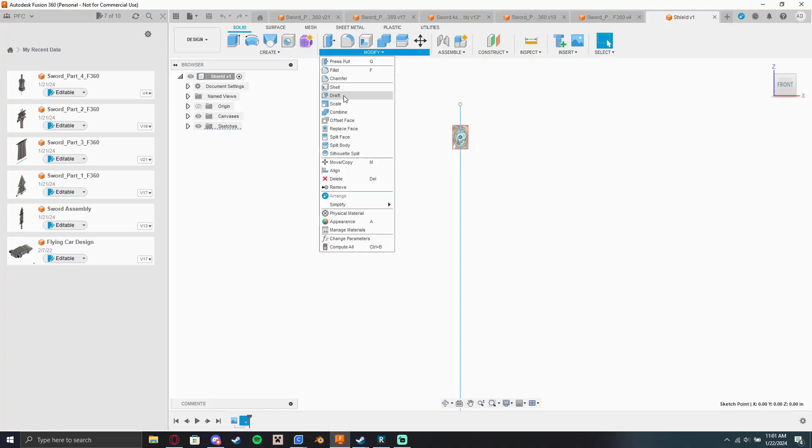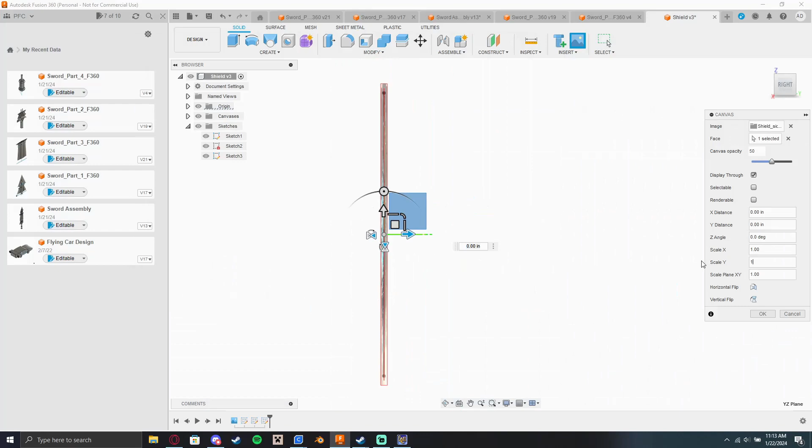When you're 3D modeling, you have to start somewhere, either an idea, a reference, or a straight up import of whatever you want to model. As for me, I used a combination of my idea to create my Renaissance Fair costume out of a 3D printed material, and to do that I wanted to model it myself, as I could not find the models online. I wanted to make them myself to challenge my ability and skill for 3D modeling, and so that's why I'm here.

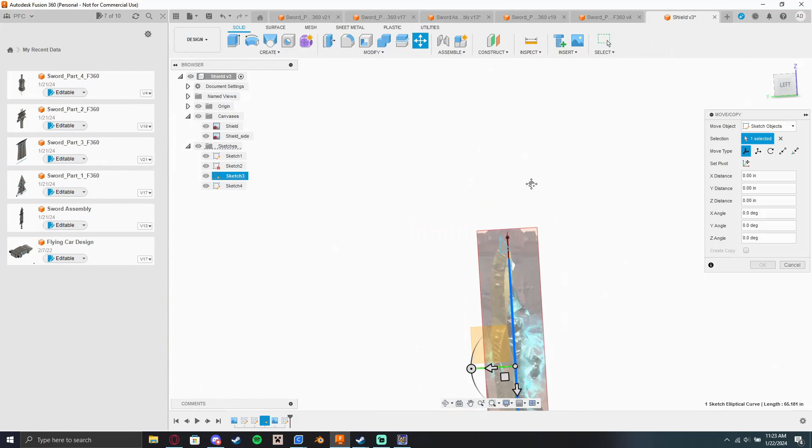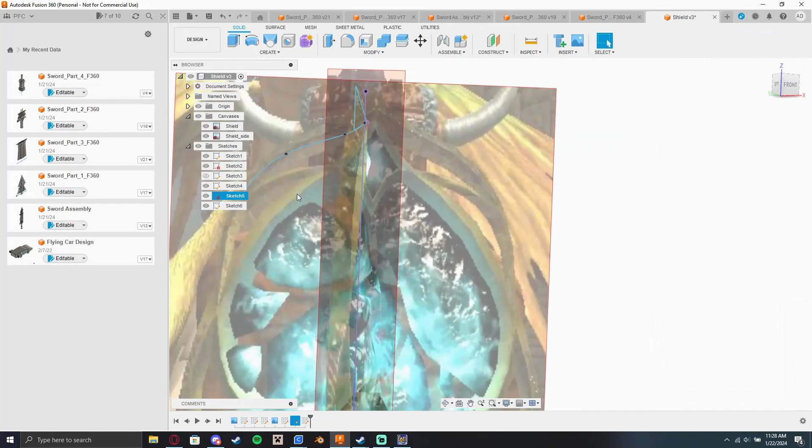So the idea was to start modeling the shield. I'm not going to show you the sword because I've already made that, and look forward to a video of me swinging it around like an idiot. But for this video, I'm going to walk you through step by step of each process, what I've done, what the idea was, and what I learned. So stick around and find out what happens.

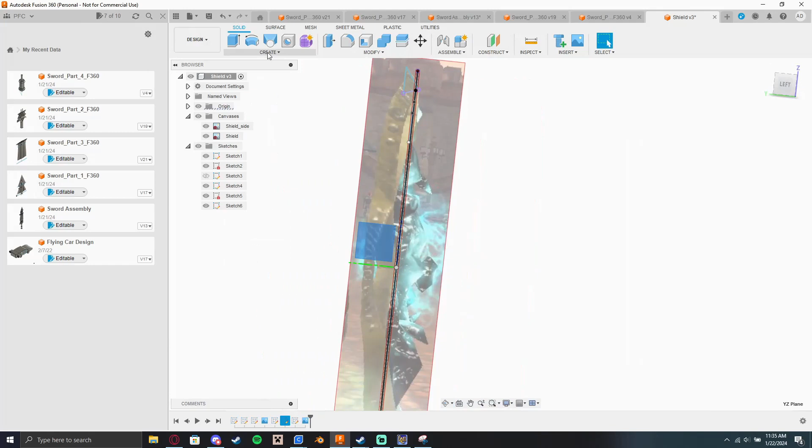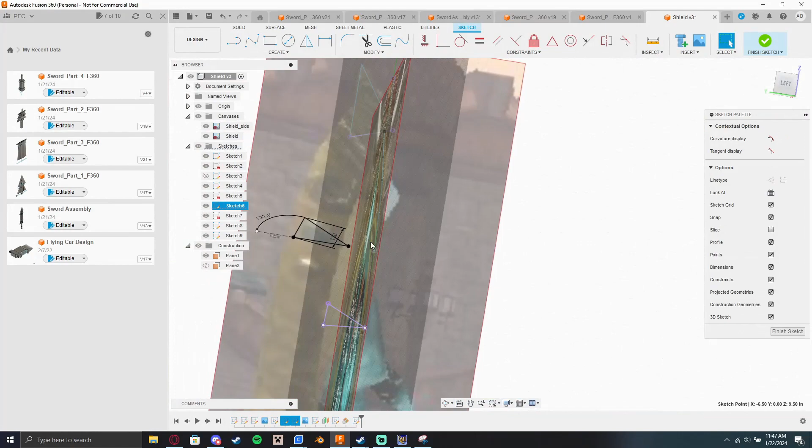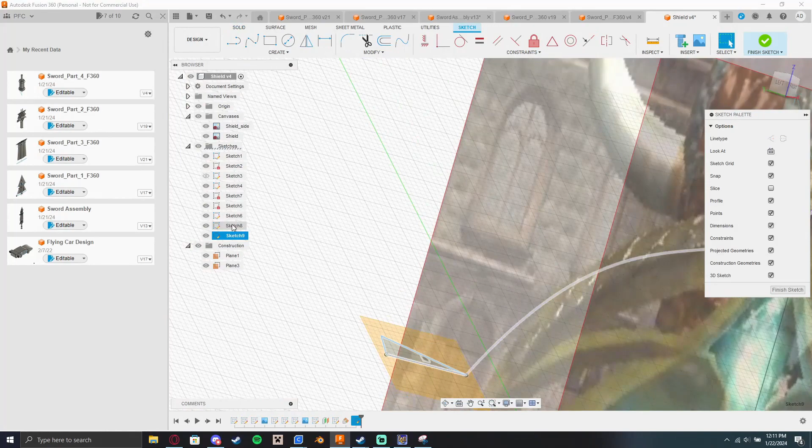As I lofted each profile or shape I had made, you see here the lofting process of going from one shape to another, just working it through to make it fit the image of the shield better. Now that's how it's done: you make two profiles, a triangle, square, circle, whatever, and the software takes the two shapes and connects them as easily as possible.

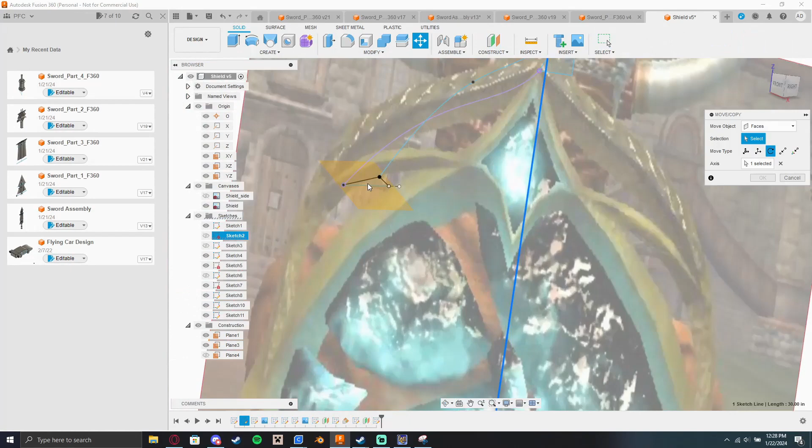But you can also use rails, which I used as the outlining of the shield, so that the loft knew what path to follow when producing the model. I continued doing this throughout the modeling process, as it was the easiest and best way to create these complex shapes. I also wanted to create a rail system so I knew it was following the outline of the shield.

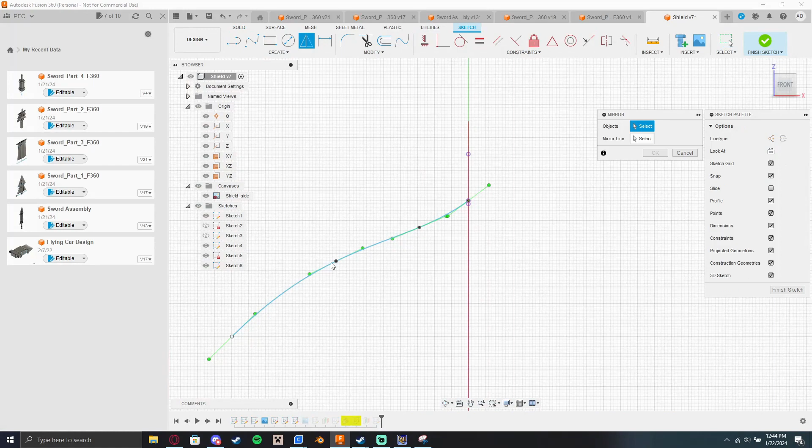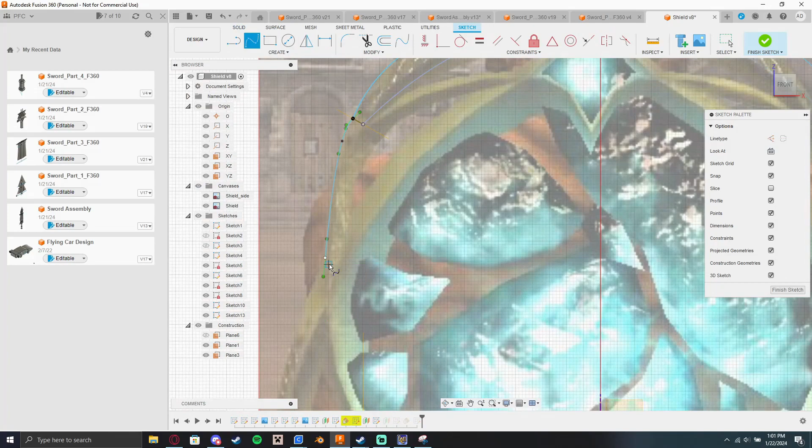So I wanted to outline both the back side and the front side of the shield so that it could get depth alongside the shape. That's what you see me doing here, just trying to get a good feel of the shape, then outlining the rest of the shield so I have it ready for the rest of my shapes and the lofting process.

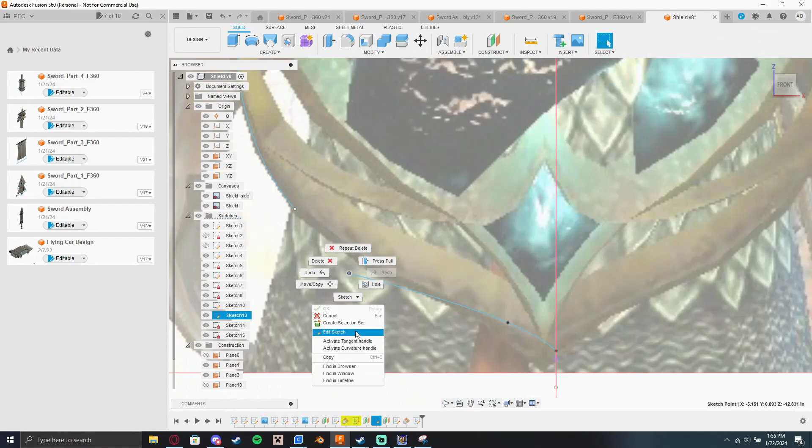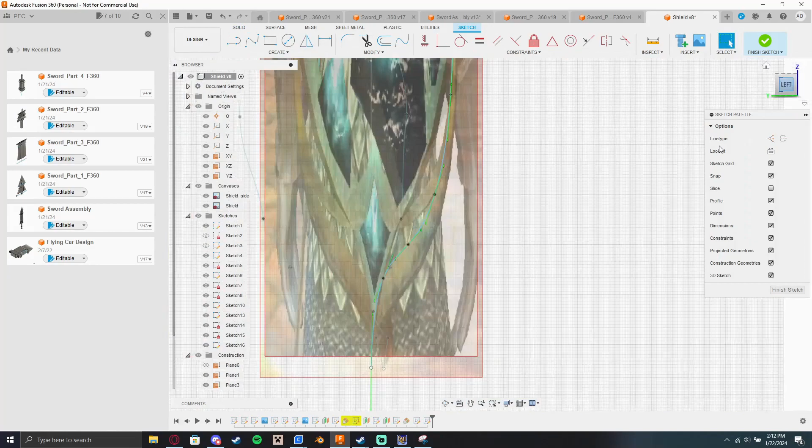Initially, I was not aware of this feature in Fusion 360, the modeling software I'm using - it's actually free for those interested. I wasn't aware you could mirror 3D objects through a plane. So what you saw me do earlier was actually try to mirror the lines on both sides. Later on, I'll delete those lines on the other side and just use the lofting mirror feature to mirror one side to the other, which made the modeling process a lot easier, as I was trying to keep symmetry when creating the shield.

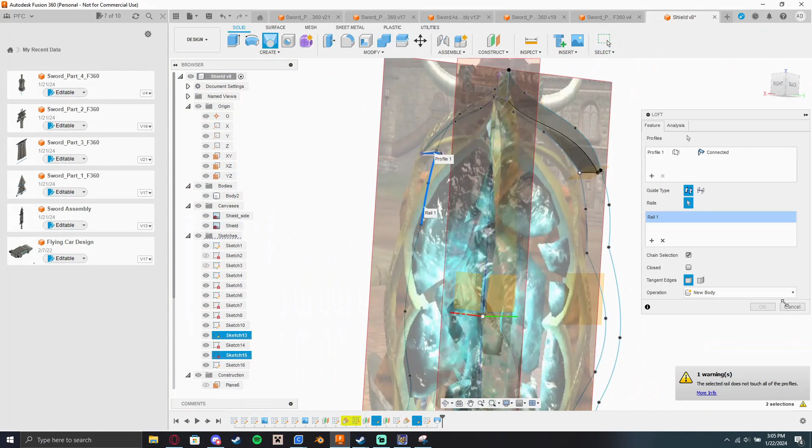As you can see here, I've already outlined the outside of the shield so I have my rails ready to perform my lofts. I even created a final profile for me to loft to in the end so I could have it there as a final stopping point. And then this was a bit of trouble for me, trying to figure out a loft here.

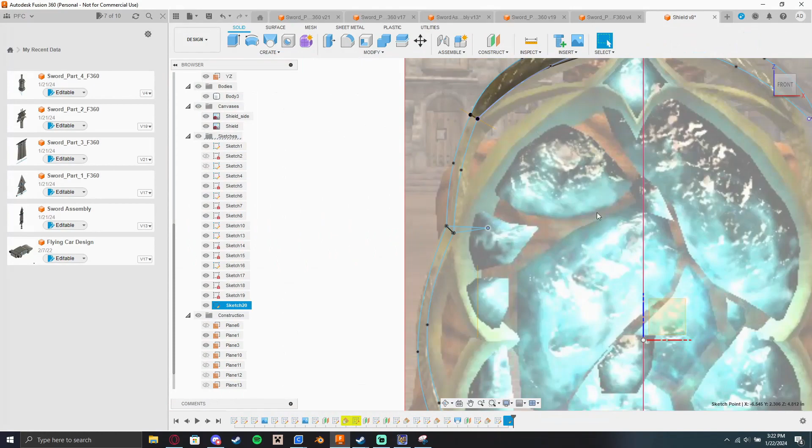It was trying to figure out the shape and the depth, because it was a complex issue, like trying to figure out how to angle it, and then angling the loft and the rest of the part to make it fit the background image, as you've been seeing throughout this video.

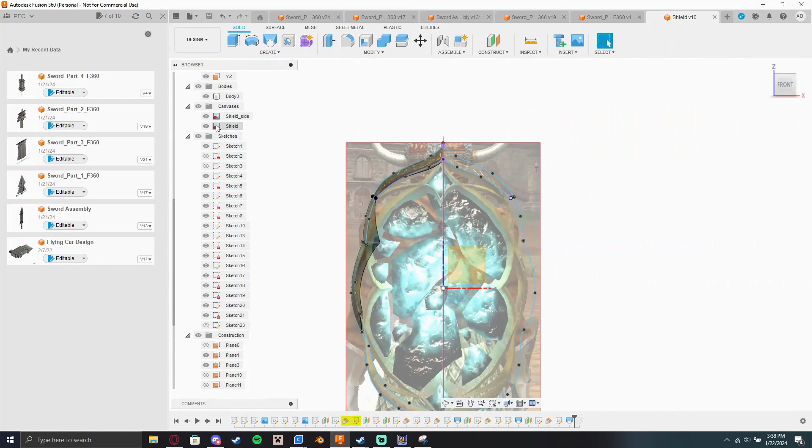Then it was another difficulty to match this as I continued to loft from one profile to the next, trying to have an easy time doing depth without really any actual depth in the image. You just have to eyeball it and then trial and error it.

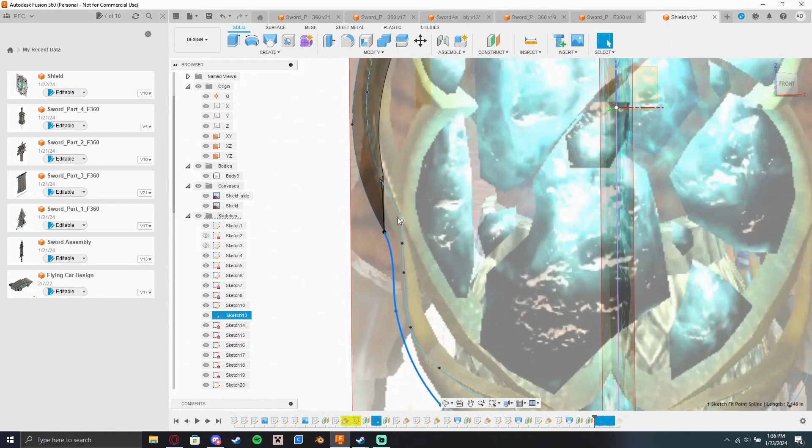Also, to make the lofting process a little easier, I extruded an extra piece here, just to get a bottom profile, so it would have that twist you see in the shield a bit, and then have an easy profile to loft from and get a good loft model from that.

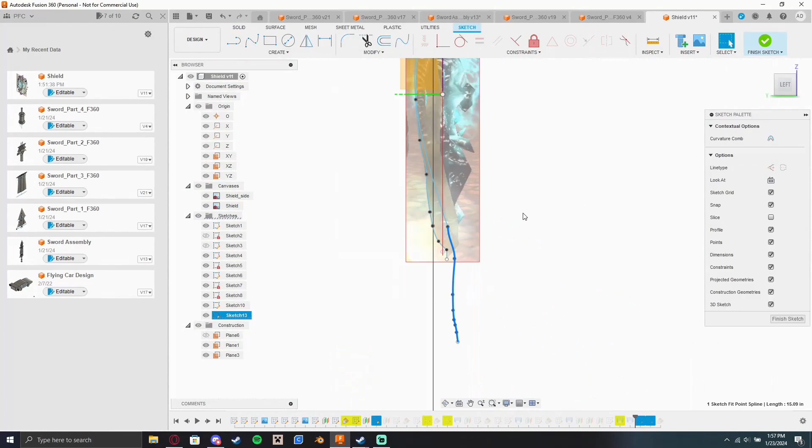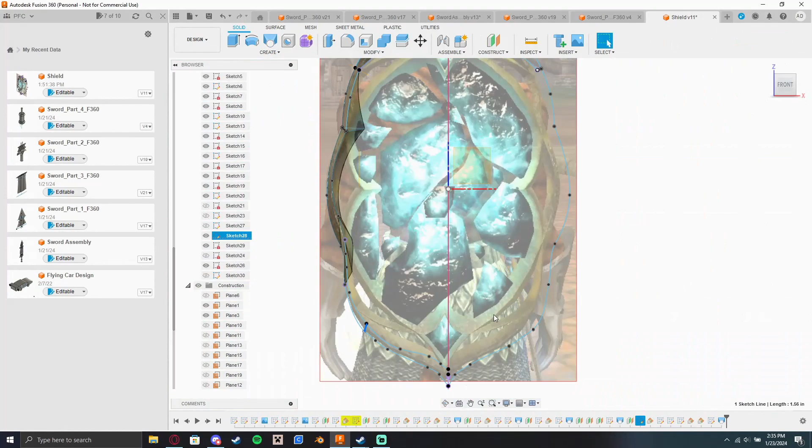So here I'm just messing around with the lines, trying to get the depth right and get the model to be correct with the loft, then correcting, lots of correcting, as I try to learn and figure out which loft would work best based on the results from the loft itself.

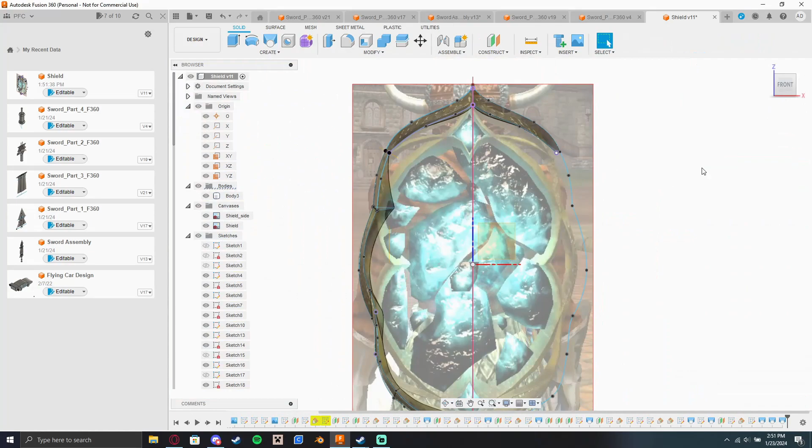Finally making some progress, I'm now trying to figure out how to best model this base, which I figured out relatively quickly, as it was at the bottom of the shield, a little more aligned with one of the already preset faces, so that was pretty easy to make.

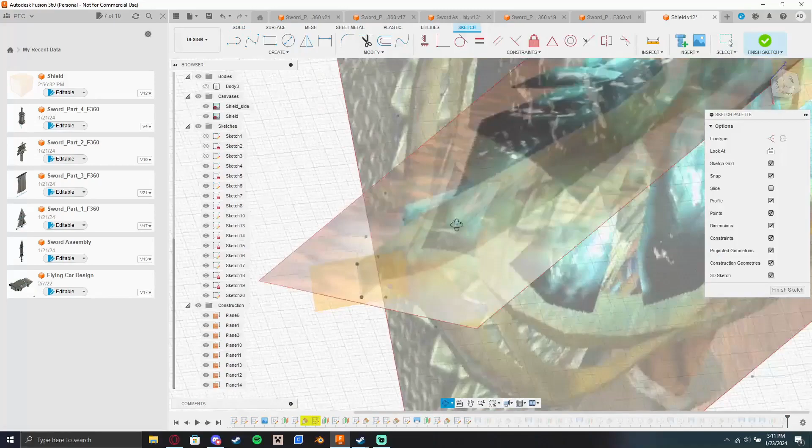Again, here I'm trying to copy over the loft to the same side, but then I learned after this that I could just mirror the body from one side to the next, and create that symmetry, and not have to worry about creating symmetry manually.

So you'll see me deleting the lines there, and then trying out the mirror, and it's working very fantastically with the full model outside of the shield already in place here.

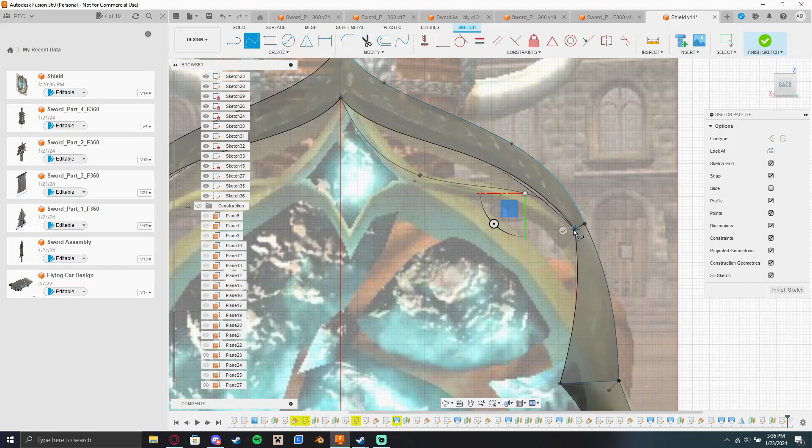So here now I'm trying to get the middle of the shield, which was a little tougher, because not only did I have to line it up with the already preset model I'd already created, the outside frame as I'm calling it, trying to make it flush with that.

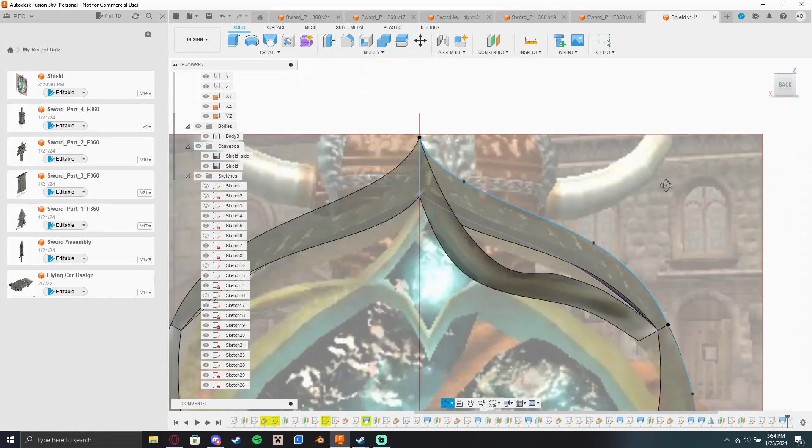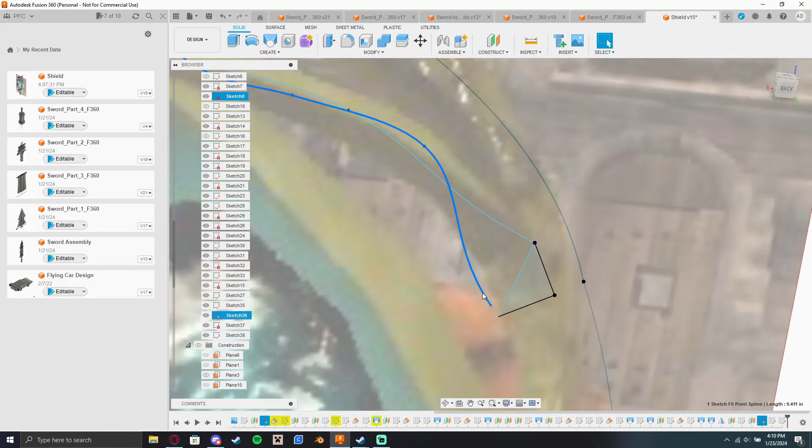This shield has that ovular sort of look to it, and I had to match it with that internal shape, where it curves in and has a divot point, then curves out like a bracket, matching it to that, and creating depth to it was a bit of a challenge.

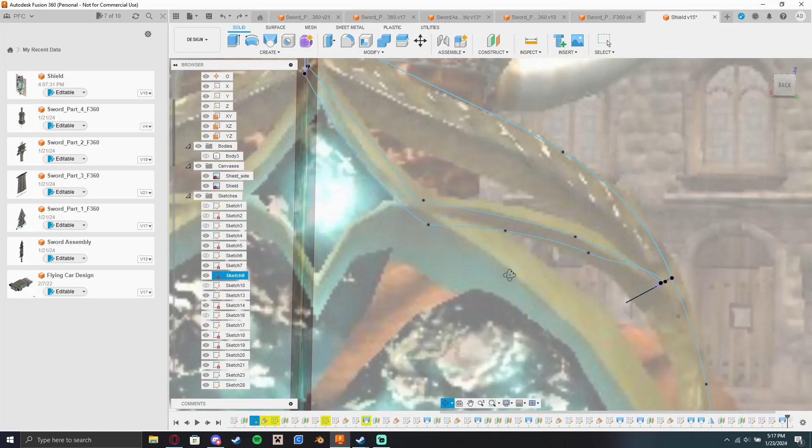So there was a lot of messing around with the model and the lines just to get this thing modeled correctly. It was a bit of a hassle, but through lots of messing and fiddling with it, I finally got the correct look I was aiming for, then it was a matter of lining it up with the rest of the model.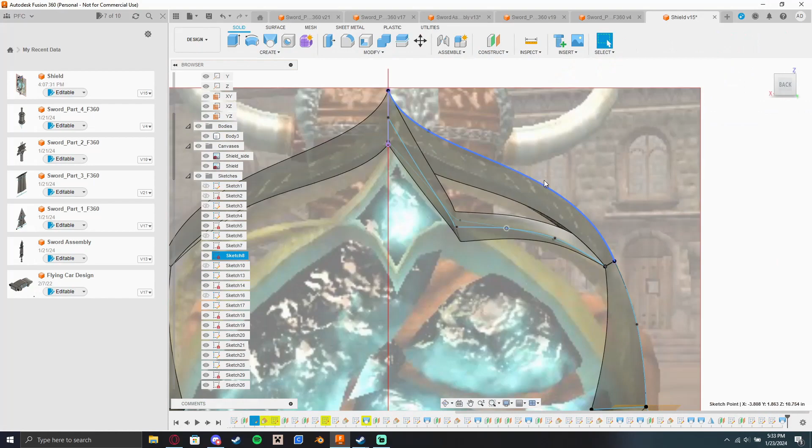As you can see here, I'm trying to line it up so the loft is flush with the rest of the model, and it has a sort of flat back to the shield, but also give it a little bit of that lumpiness, as you can tell from the side view.

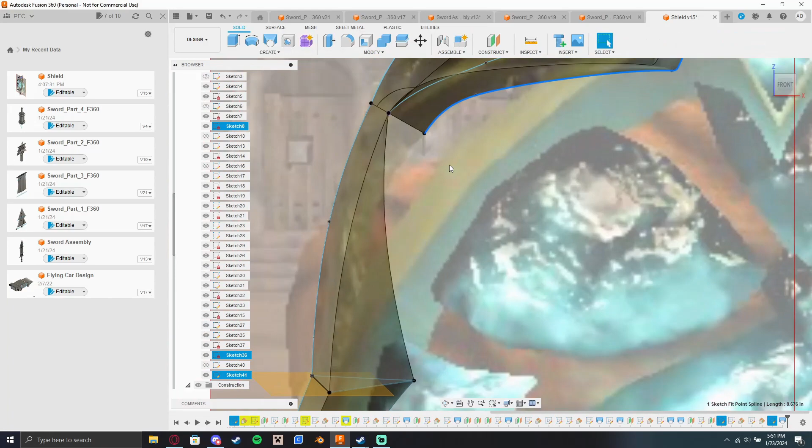You can also pause the video when I get to a side view to look at it, that it has a little bit of bumpiness there, and I'm trying to match that, but also create a smoothness along the back, so that it looks more like a shield crafted by a master smith.

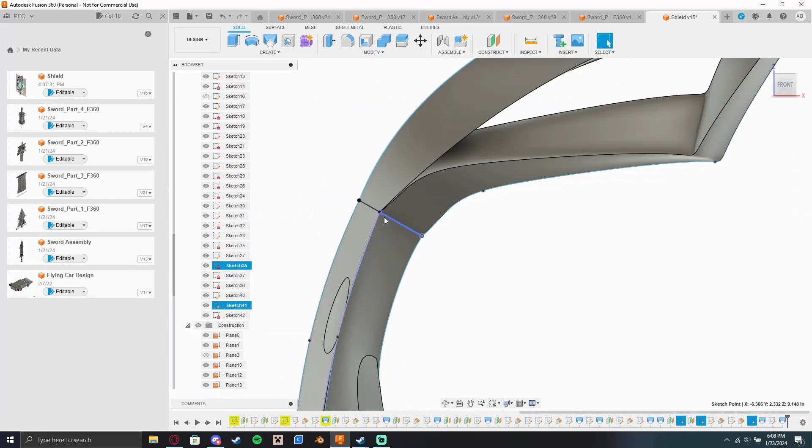So here I'm trying to match not only the first loft that I did on the middle, but also trying to get it to curve inwards so it's flush with the rest of the frame here, which worked very well in my favor and helped create that flush look.

So next up was creating this centerpiece in the top section, and this was a bit of a challenge because it had a sort of cross section going on here where I had to create everything based off that.

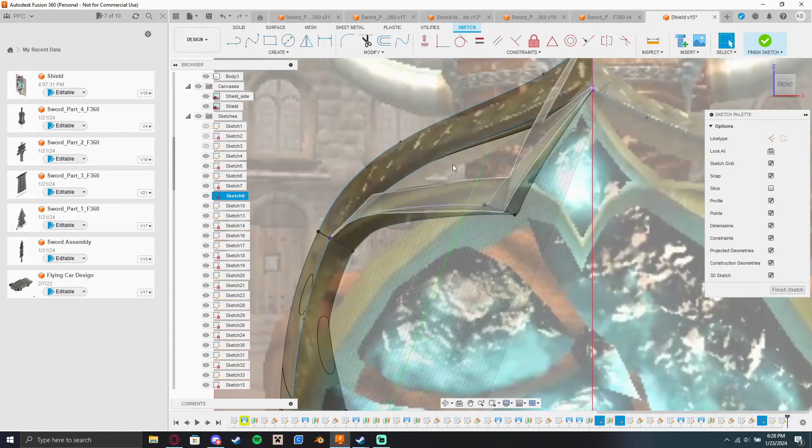I based everything here off of triangles because it's got like a pyramid almost look to it. So I wanted to base it off of triangles and try to angle the planes.

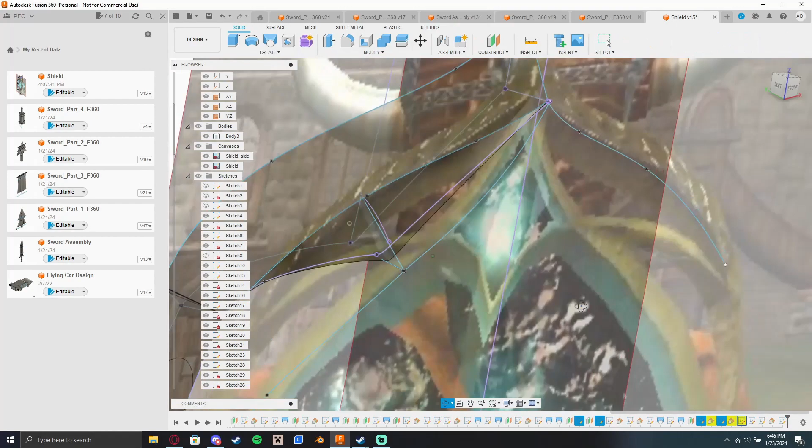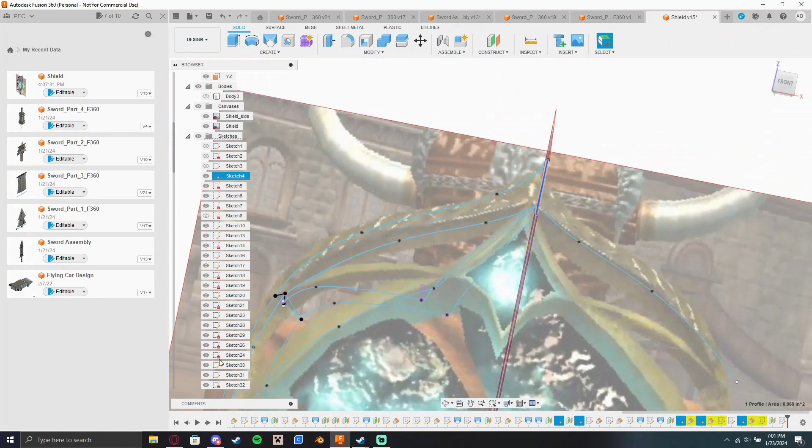The constructed planes, to match that pyramid look, was a bit of a tough challenge, and then matching the lofts to those areas was kind of difficult. But learning from my mistakes and from how I did the rest of my model, I was able to get this pretty quickly done, and I was able to even get some depth here.

Then another trouble with making it smooth, but that is just the process of getting this done - messing with your lines, messing with your rails, messing with your loft. Just try to get it perfect, as good as it can be.

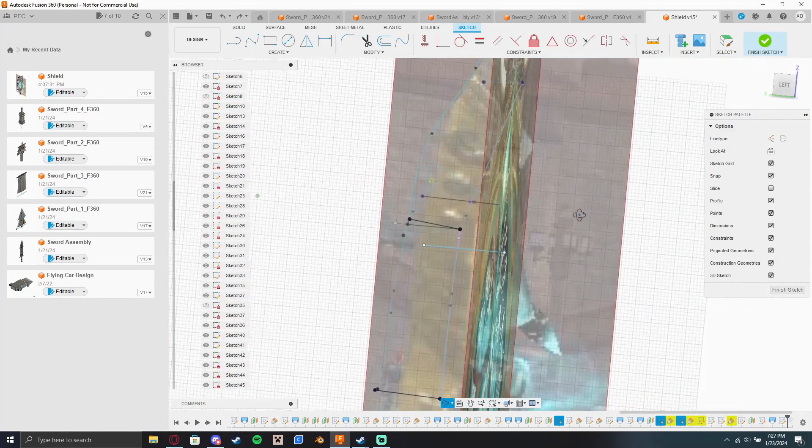And that's what this is about - taking your idea, putting it into life, learning about where you're going wrong, and then figuring out how to correct where you went wrong, and implementing that into what you're doing later.

So as you can see here, I then did the very center part where it was easy to connect to a very small triangle, and that loft was very easy to do.

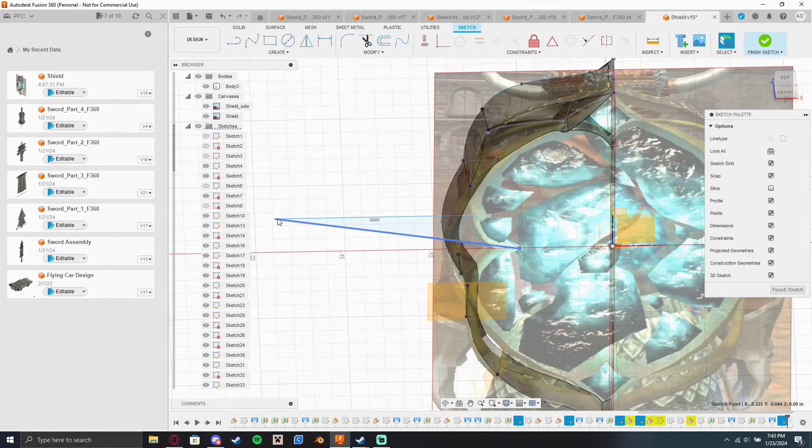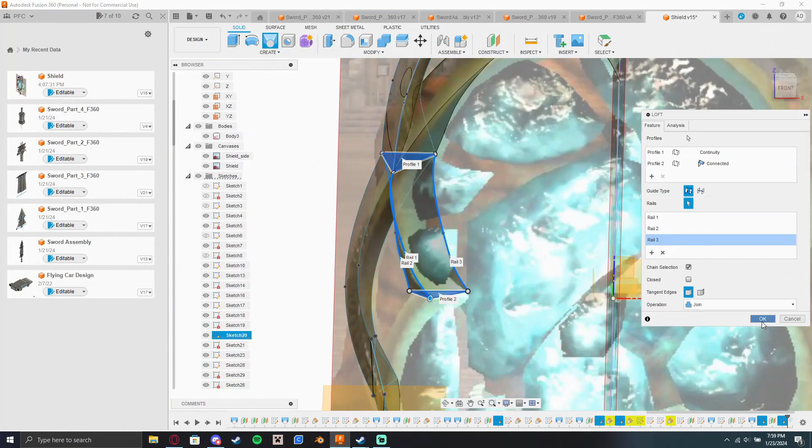And then this next part was getting the loft to be this weird shape where it was, again, another pyramid looking shape. Fortunately, it was just a simple triangle loft, and then making it follow a simple path because it's sort of an easy arch.

And then matching that on the other side and creating depth alongside that was a bit of a challenge because it was moving around the lines and then making sure that they lined up with the picture that I have here, and then also making sure that it looks pretty good.

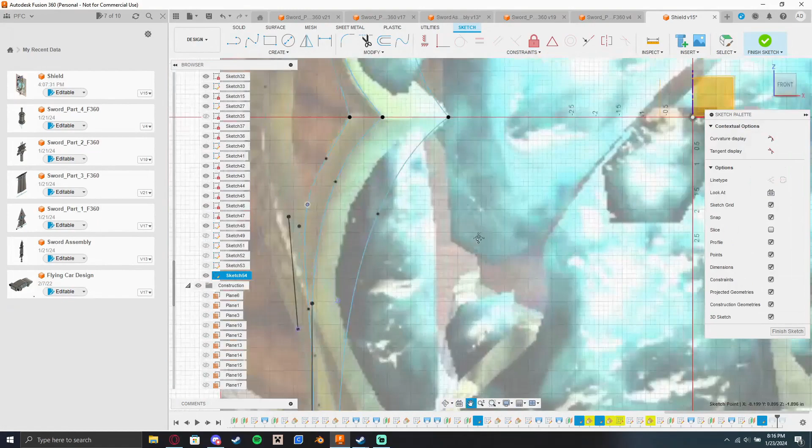And here I'm doing a little bit of correcting because I noticed that there was way too much curviness in my lines, and that caused not very good smoothness.

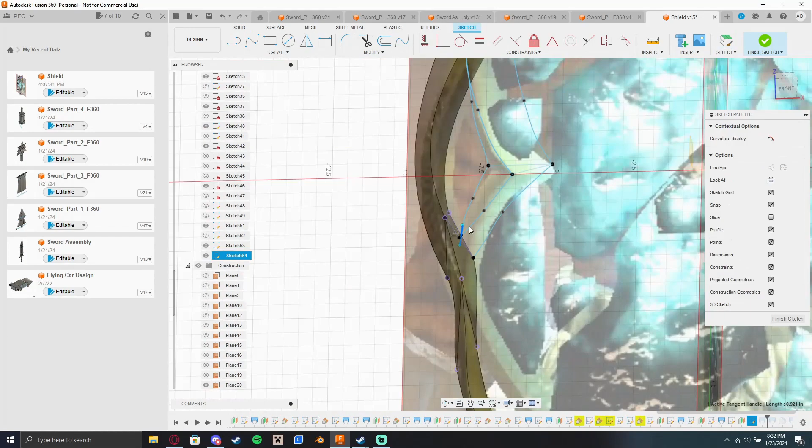Now here I noticed that I had compared my model to the actual image, and I saw that it had a cross section here that I had completely ignored. So I was trying to create a much more smooth model here by subsectioning out the top of the inner model to create a better loft, and then creating a better cross section.

Which will be corrected after doing a couple more lofts, which you see me trying to do to get these innermost parts of the shield as I model it out with more triangles.

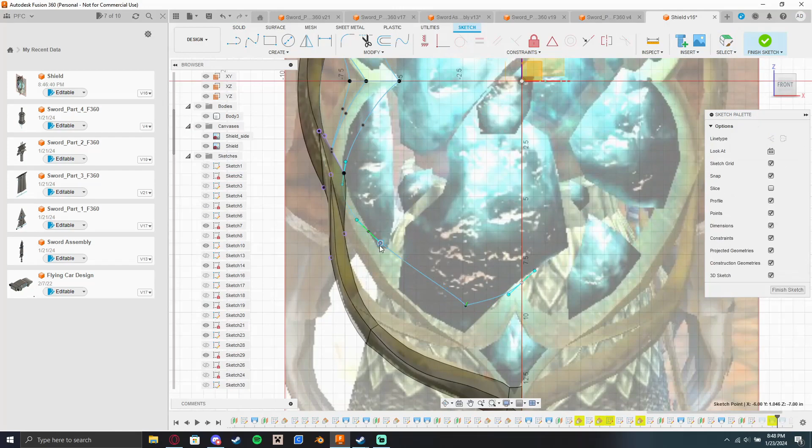So doing these lofts, it's pretty hard. You have to make sure that the lines for your rails are touching both profiles, and if you want it to be pretty smooth, you have to match it with what you already have.

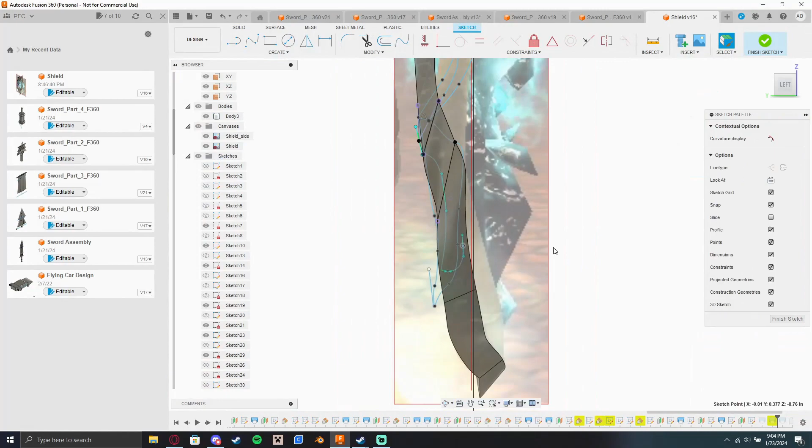So you have to use collinear constraints to make sure that they are flush, and then even that can cause issues, but you just have to play around with it to figure out the look you're going for.

So here I am just creating a pretty long loft here because it's a bit of a thicker piece that goes all the way down and up, and I wanted to start out with just one part of it just to get a feel for it.

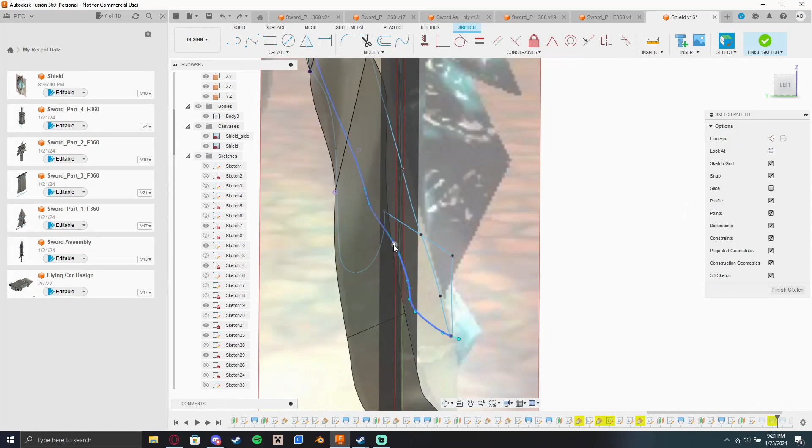And then figuring out how I get this weird looking loft because it's going from almost a completely sideways profile to a completely 90-degree angle profile where it's a little bit weird, it's a bit of a weird loft.

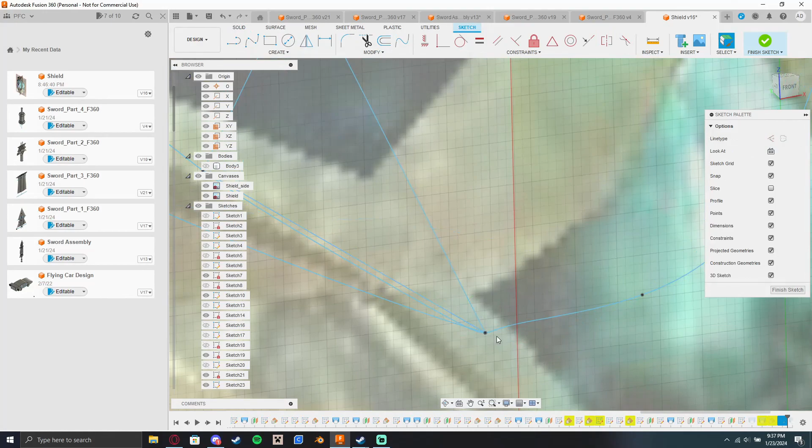And so I had to figure out how to - so here I had to create some extra profiles and mess with the model a little bit more to get that loft that I was looking for.

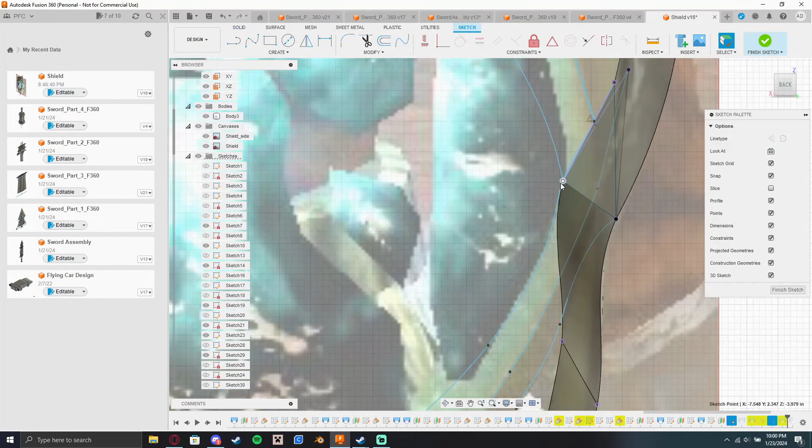And so there you go, fixing up the issues, making sure that it's nice and flush. You got to make sure that all your lines are collinear, and then making sure it matches the model, and then making sure the loft is the way I want it to be, and then it follows the correct path so it doesn't look super jagged.

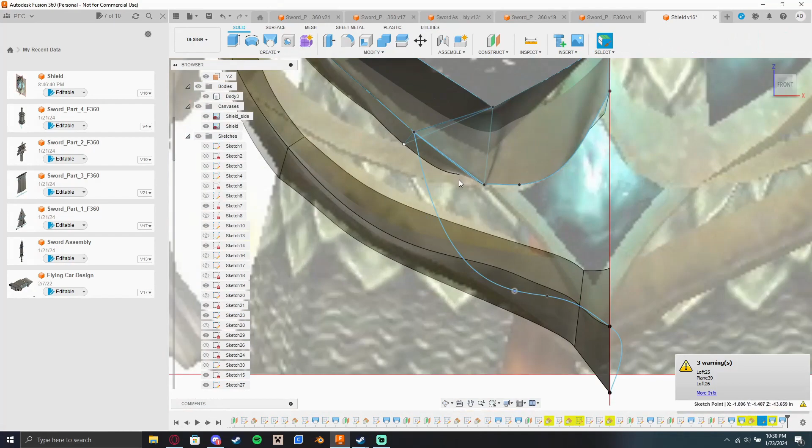Trying to make it as smooth as possible. So now here I am finishing up the last of the lofts, getting it to be smooth with the base of the shield here, and there you go.

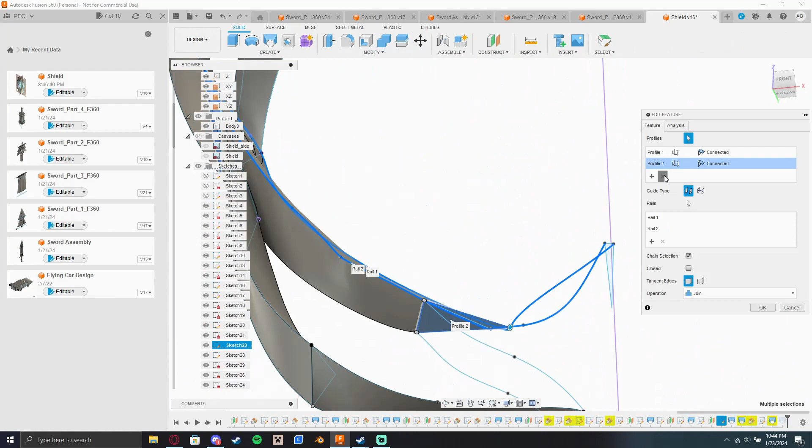Fixing up the railing because I noticed that it was not flush, fixing up the profiles because it wasn't matching up with the model, which was really dumb, so I fixed that. Then fixing up the lines, making sure everything's collinear. This is me debugging my entire model because I noticed that I had a bunch of warnings.

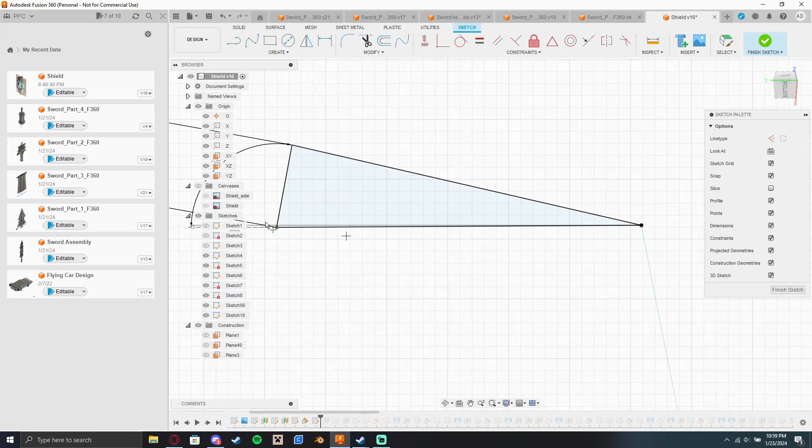I thought to myself, this is probably where everything's going wrong. So I first started out at the very beginning, made sure everything was back to normal and no errors were to be found, corrected everything, and just went through the list of all the warnings or errors, but it was mostly warnings because if it was errors, it wouldn't let me continue.

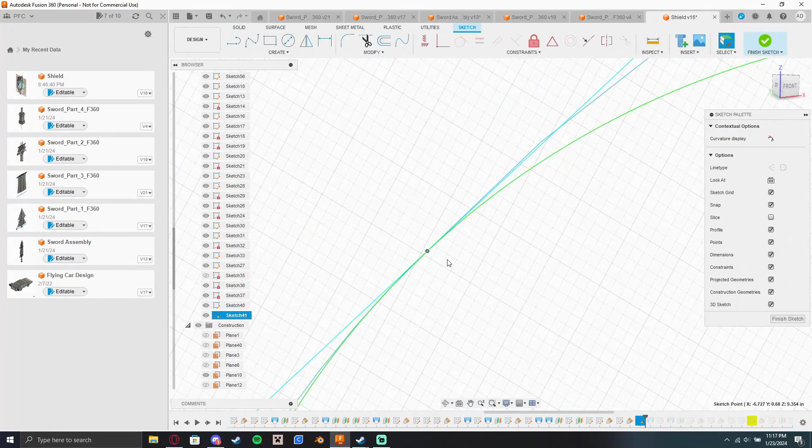And then fixing them, and it yells at me like, oh, your rails aren't collinear with the profiles, which is a big issue, but here I am fixing it, and soon enough that will get rectified, and you will see a much more fluid model by fixing these issues, and even a better flow of the lofted parts, as you will see momentarily once I finish solving all of the issues that this model had, which was a lot.

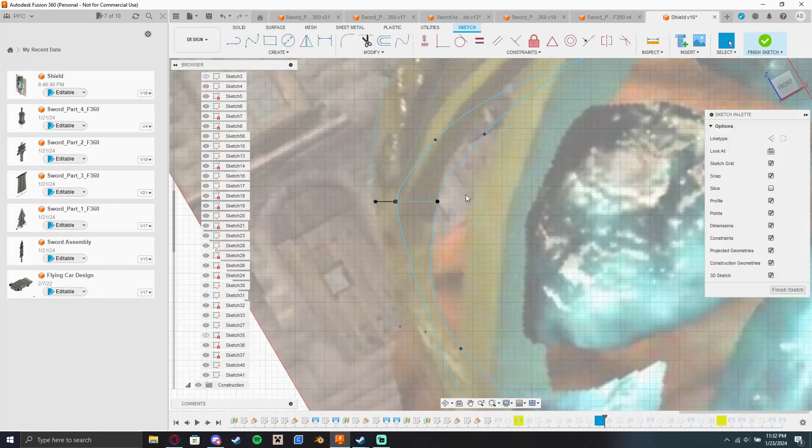It had like I was moving around the lines way too much, where that caused some lofting issues, and even some others where it caused the model to be just bad.

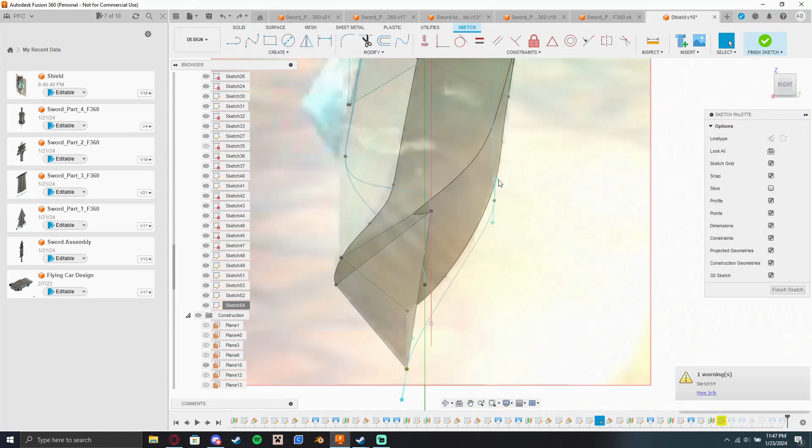So I finished that up, and then finished up the second to last loft that I was looking to do, which was from this middle piece down to the outer piece of the frame. So I'm doing the inner frame to the outer frame, creating depth and fluid, and just getting that shield look in there.

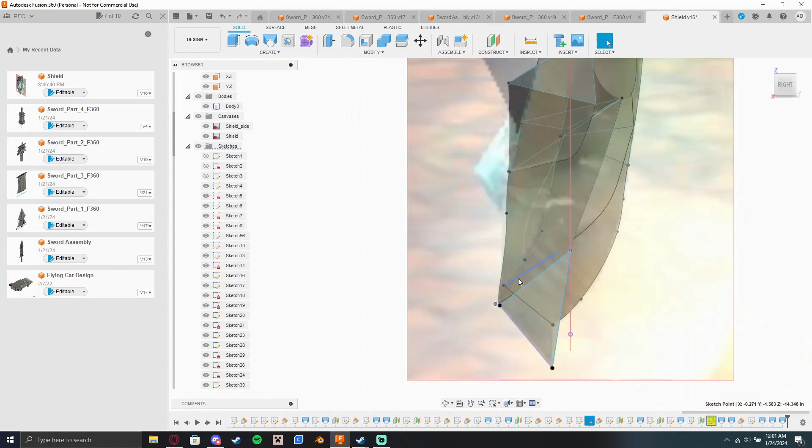You can see here just me trying to get it as flush as possible with the rest of the outer of the shield, which is what I'm really looking for. I'm looking for it to not be super jagged because that can cause issues, and it also isn't very aesthetically pleasing. So I fixed that, got the loft to be right.

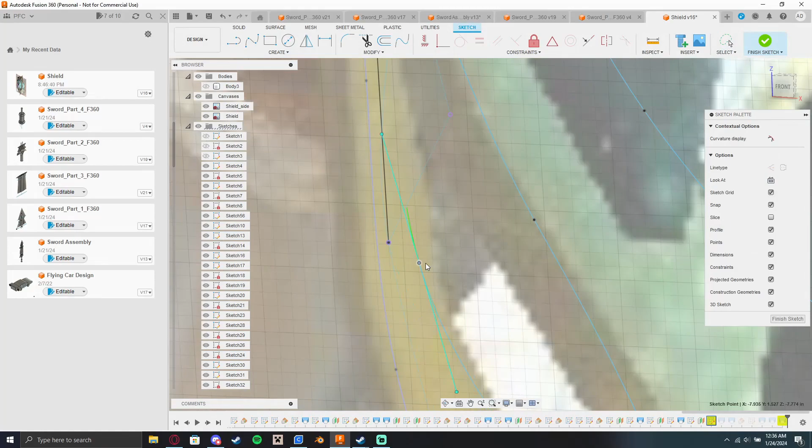What I did was finish up that last loft that connected the shield, the bottom shield, upwards to this middle section here, and also connected the very inner piece together, and then got that fluidity going. So there you go. Once I finished that, it was a matter of just creating a mirror, and there you have it. There's the full frame of the shield.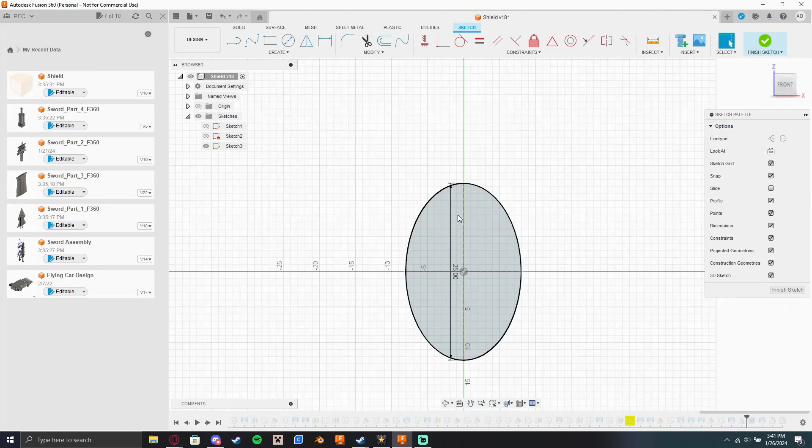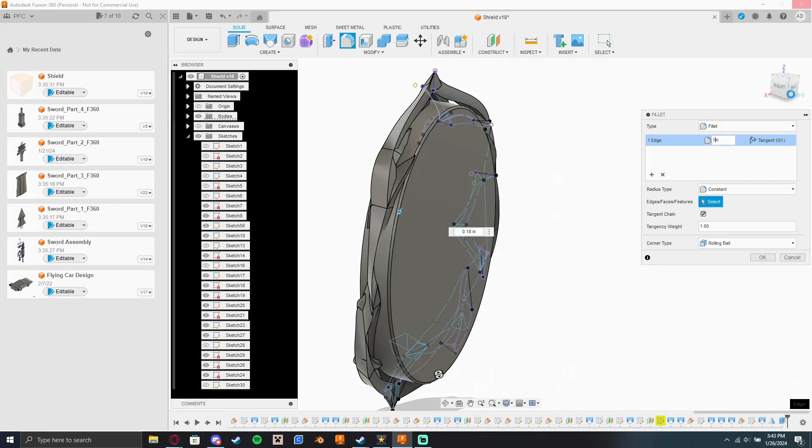And then after that, it was making it so that it was more functional. I can't wield this in the frame, so what I did was I added a centerpiece, which was an oval shape that was going to be extruded so that it touched the frame, and then it extruded backwards a little bit to create some girth to the shield and create some protection if needed.

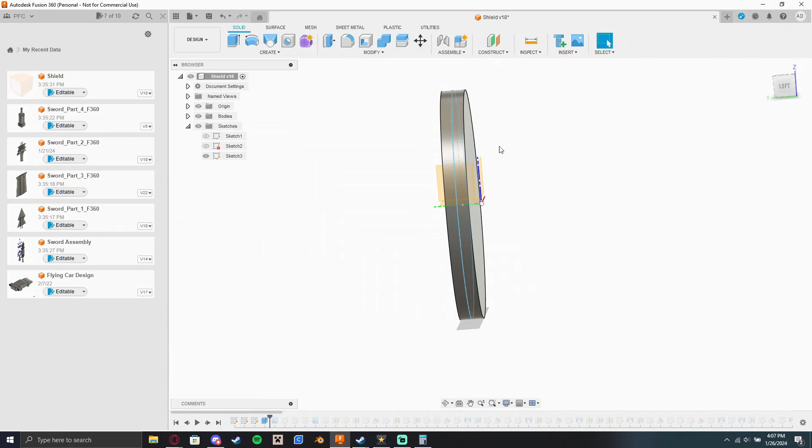And that's what happens here, where I am just messing around with this oval shape, and the fillet wasn't working out the way I wanted to. So what I did is I actually went way back to the very beginning of my model where I created this, and then did all of the extrusions and fillets before I even made the model.

And then you see me here, and then lofting it in so that I can have a space to create handles, which you see me creating here, where I can put my arm through and then grab on the other side to bolster it to my body.

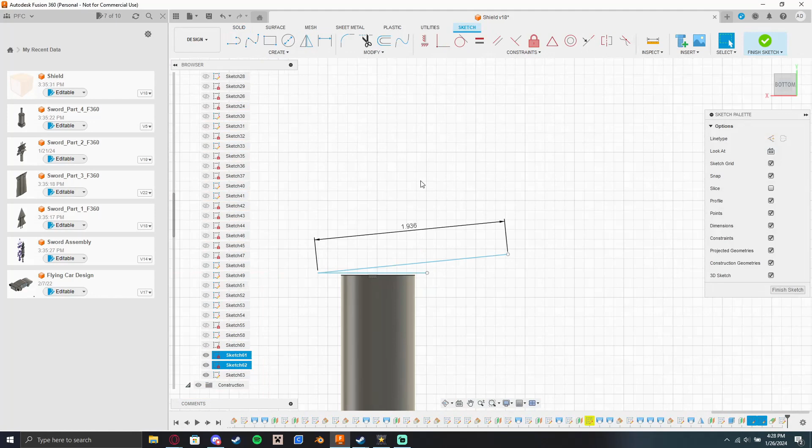And so this was pretty easy to do. All you have to do is just make it so that it revolves around a line right against it, and then go across to the other side, and boom, there you have it.

That's the shield. So the last bits of the shield that I will want to be creating is the rocks, as you saw in the image, and then finishing it out from there, and also splicing it up to make it to be 3D printable.

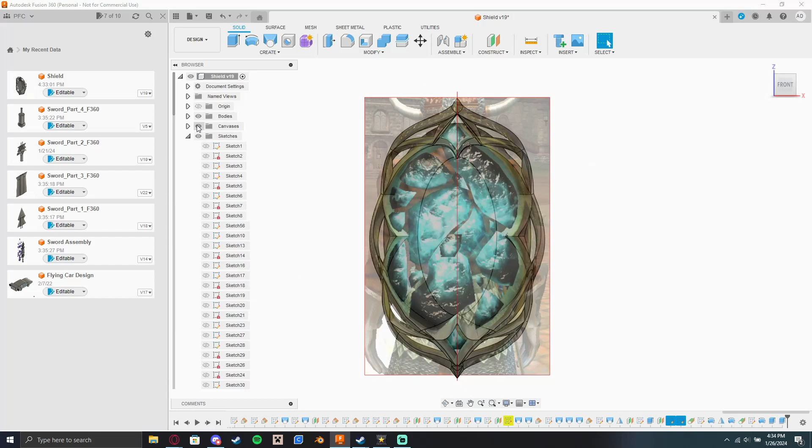But there you have it. That's my shield. So thank you for watching, and I hope you get into 3D modeling, and let me know if you have any questions in the comments below.